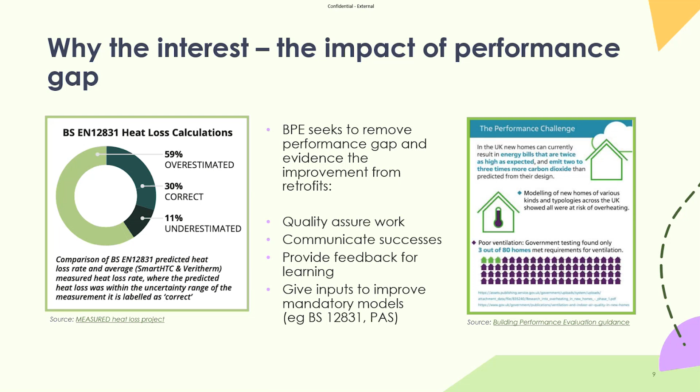So it's all about assessing quality, but how do we actually do it? What are the techniques that get used? Well, there's a range of options, most of which will provide part, if not all, of the picture. So it's often a case of selecting from the menu what suits your project best.

The most basic thing to do is what pretty much everybody already does when considering retrofit. It's a construction review, collating what you already have on record regarding the construction and energy performance of your home. You can get this from EPC, from asset records, from other data in your organization. And it's very scalable and affordable, but it's often quite low quality. And in most cases during retrofit projects, and particularly funded retrofits, you're likely to find that you need to augment it with additional on-site surveys.

Alongside that, you've got options to collect occupant feedback. That's a really underappreciated but powerful approach. It's very valuable in highlighting specific pain points, although it is obviously subjective.

For gold standard and high confidence that you get the results you want from retrofit, more technical methods generate solid quantitative data on the performance of the building fabric. These complement occupant feedback with tests that measure the performance of the fabric alone. And that allows comparison of benchmarks before and after you've made the investment in the fabric of the building. So examples of these would be air pressure testing, thermography. Both of these are quite widely understood.

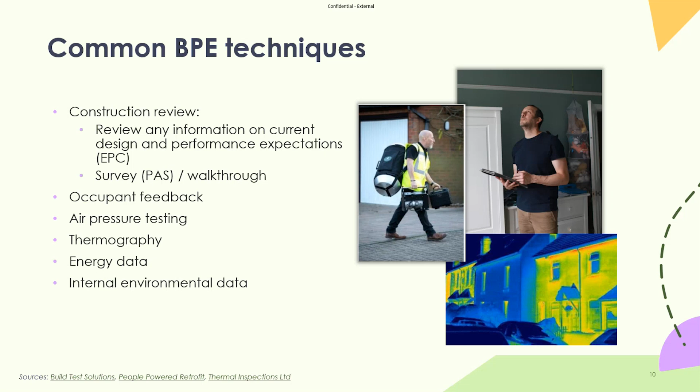So this next bit is in rather more depth and detail than the Building Performance Evaluation guidance, but it's kind of important because we've got this new abundance of data, and that needs quite careful handling to make sure you get solid and accurate information. The first thing I would say is there is a difference between monitoring and measurement, and it's important to sort of get our heads around this.

Monitoring will report conditions in homes day by day, month by month. It will allow you to spot homes that are deviating from what's normal. Measurement is taking the same data that monitoring delivers, but it's applying it into a consistent process, a test in essence, that allows you to compare performance between homes.

And what that means is that not all monitoring data is suitable for particular tests and measurement. A very simple example, if you want to run a test or measure condensation risk in a bathroom, you're really going to struggle to do that with data from a thermostat in a hall. And so there are now, as I say, a lot of options for collecting environmental data in homes: smart thermostats, connected smoke alarms, data from heat pumps or TRVs.

But it's really worth taking a step back and thinking about what tests or measurements you actually want before you assume that the data from those is going to be suitable. Obviously, there's also an increasing number of smart meters out there in the world. I would say they're very, very powerful and useful, but retrieving the data from them can be more effort than expected. So I've seen a lot of retrofit projects that are now budgeting for and planning for monitoring post-works.

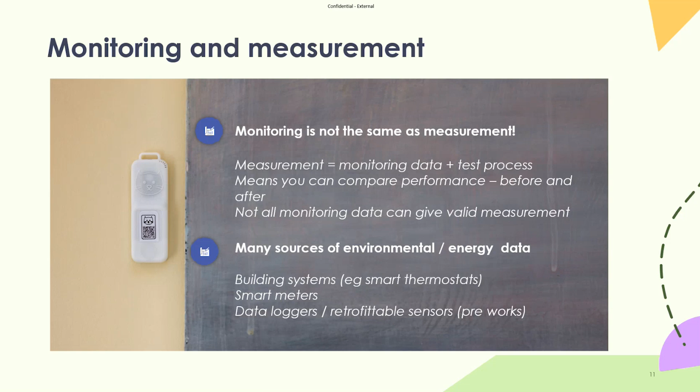I think fewer have found a way to cover the testing pre-works, and I'd really advocate for trying to find ways to do that, because it's a much more meaningful set of measurements if you're able to actually understand what your baseline is, where you're starting from.

Okay, so all of this data, you often find you've got an enormous amount of data coming out of every house, and so the key thing when you're trying to work through hundreds of homes in a retrofit is to turn that as quickly as you possibly can into a few key figures, a few benchmarks from each home that will actually move the needle and matter. So what do we think is a helpful benchmark? How can we compare the performance of a top floor one bed flat with a four bed semi-detached?

Well, there are a number of things that I look for in a good benchmark. You want the measurements that reflect the performance of the fabric of the home as much as possible without too much influence from the residents. Another way of thinking about this, if you change the tenants tomorrow, how much might that number move? So you want also measurements that can be validated or tested for accuracy, that bear a proven relationship to what's going on in the real world. And of course, you need measurements that you can make in an affordable way. We'll get onto that in a bit.

We also want benchmarks that are meaningful for the people that are using them. We can, with a kit that we use, provide really technical benchmarks like heat transfer coefficient, scientific tests, physics-based numbers. And those are very useful for designers who need accuracy in the measurement and are familiar with building physics. But if you use that to talk to tenants, actually, that's not what they care about.

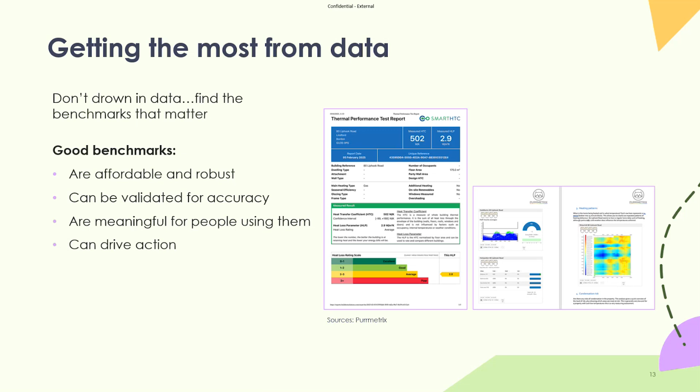Finally, of course, you want the measurements, the benchmarks that drive action, whether it's deciding which homes need to be prioritized, which homes might need some more assessment to understand whether there's a particular problem and what the root of that might be. So here's a quick example of a test process in action, and then we'll get into a little bit about what this delivers. This is really a standardized assessment for retrofit benchmarking. It's delivering information on heat loss, condensation mold risk, air changes or ventilation in the home, and comfort.

We're using here data collection equipment where we know the performance of the sensors, we understand how to deal with data gaps. We know that we will be collecting data for 3 to 4 weeks. We have standardized locations for multiple sensors within the house. So, we know which rooms we want them in and we know where we want them in the rooms. And we have a process for how and when we collect energy data.

In this setup, we're reading temperature, humidity, CO2 data in a home for 3 to 4 weeks, and we're reading the meters at the beginning and at the end of the test process. This is a process that's used before and after retrofit, and it's important that we use the same process each time.

That said, it's really important to balance this accuracy of the test process against how easy it is to use and how acceptable it is to the residents. You need something that isn't going to require any change in behavior for the residents. You need to just have it sitting in the background quietly collecting data. So that's an example of a fairly straightforward test process.

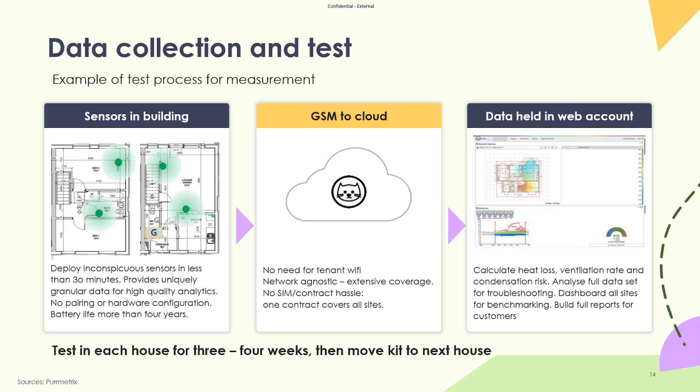Perhaps we can have a look at some of the results. One set of results that I think people are very interested in at the moment is heat loss testing, which provides a clear measurement of a home's insulation, designed to identify stock that would really benefit from fabric investment and also help size heating systems. This is a test that is generally done in the heating season, because we need heating energy in order to do it.

It'll provide you with three main outcomes. One is the overall heat loss from the whole envelope of the home, which is the heat transfer coefficient. Unhelpfully, that number gets larger the larger the envelope. So in order to allow us to compare our one-bed flat with our four-bed semi-detached, we divide that by the floor area of the home to give you the heat loss parameter. And that allows you to compare the performance of different sized buildings.

The heat loss is also a crucial input into the peak heat demand, which is essentially how much heating power you're going to need when you apply that level of heat loss on the coldest heating day of the year. So that's one example of a key measurement. This should not be changing with tenant behavior. This is an attribute of the fabric of the home.

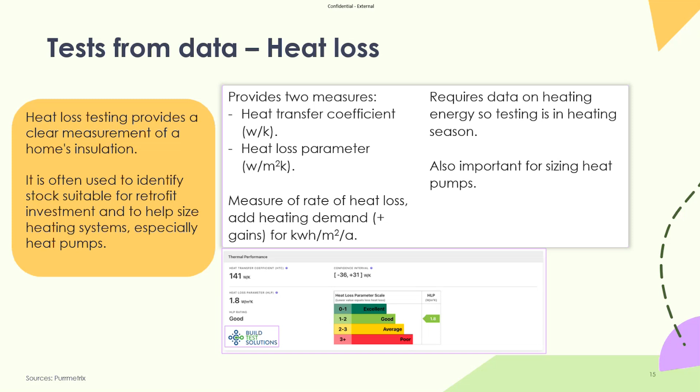Another attribute of the home that you may be testing for is condensation, damp and mold risk. This one is important to look at alongside heat loss and ventilation because all three are interrelated. There are several vendors now who provide test processes to assess condensation risk. With the process we've just been talking about, we're using humidity data to identify moisture risks inside homes from several different locations. That uses a risk model with two major factors: the average humidity for each location across the test period, and the duration and peak of the humidity events in the test period.

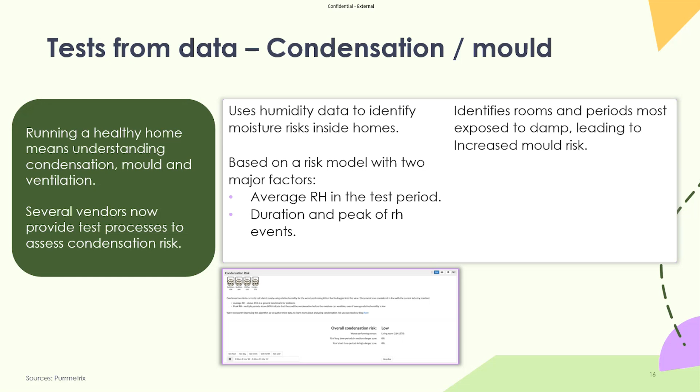And because we have data from a number of different rooms, we're able to identify rooms and periods most exposed to damp and leading to increased mold risk. Where that relates to heat loss and ventilation is that if you have a home that is already quite close to having a condensation, damp and mold risk, you may want to pay particular attention to just how much you wish to cut back on infiltration and ventilation, or at the very least make sure you have a very aggressive ventilation strategy.

So talking of ventilation, that's a tricky one to balance. It affects both heat loss and people's health within a home. Because we're measuring CO2 in this test, we can use it to understand ventilation and its relationship with heat loss and CDM. Our tests use CO2 data to measure how quickly air is replaced in the space and give you basically an air change rate. And we also look at absolute CO2 levels to see if the air quality at any point is degraded and likely to be fostering the exchange of viruses and things like that.

It's not the same as air tightness in that this is affected by a resident's behaviour. If they open a window or they're closing trickle vents, you'll see this reflected in the air change figures. But arguably, that's actually a more realistic measurement of what is actually happening in a home that you're improving.

Finally, because we have data on temperature, we're also, on the right-hand side here, using that to look at how many hours of warmth the home is providing. Generally, we think of that as how many hours of warmth between 18 and 22 degrees or 21 degrees the home is providing over the test period.

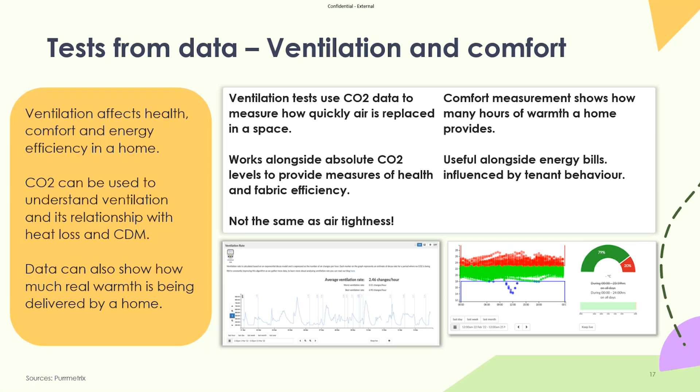And that's a really helpful thing to discuss with residents alongside energy bills because it gives them both how much it's cost and how much they're getting for their heating energy consumed. Okay, so that's the sort of benchmarks that we find useful in evaluation.

So in retrofit, it's important to understand that we've all got barriers of time, cost, resident acceptance on this sort of thing. So we've got to design a process that balances the benefits of getting good measurements of performance against the overall costs of this, the time needed to actually make it happen in a busy project plan, and residents' reluctance to have you poking around in their homes.

And specifically for retrofit, I think we're seeing an emerging sort of workflow that uses the lower cost methods initially, with more detailed investigations following on where they are needed. Now, for most publicly funded retrofit, you are likely to be needing additional surveys for compliance anyway, a PAS 2035 assessment, for example. And then you have a tentpole activity that can be expanded to include other forms of BPE.

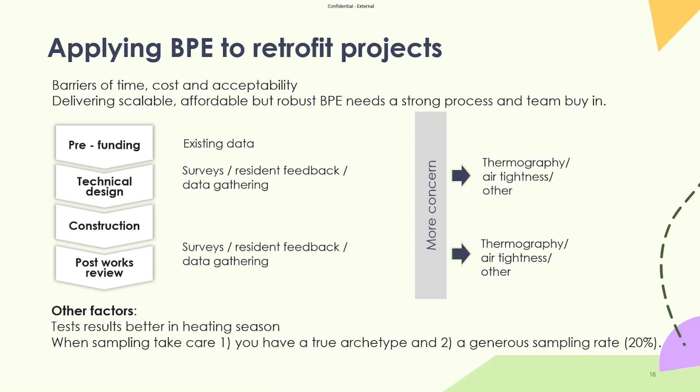Great, Sophia. Okay, so once you've put work into delivering all of these benchmarks and results from your measurements, you've got these valuable assets that you can and should really be sharing with quite a few different stakeholders who are going to be interested in the outputs of the project. Of course, the results don't just have to stay in the software platform. They can be integrated into asset management systems, get turned into technical reports, into case studies, occupier feedback reports that you can give to a tenant liaison officer.

And this is a table that just gives a few ideas on how that information can be shared, and you can really squeeze as much value out of it as possible. Residents in particular, we're finding quite a lot of use of this for resident feedback to provide reassurance on the impact on their comfort, their mold risk, their bills. Sometimes it's about suggesting ways in which residents might change their habits to engage more productively with the new environment.

For asset managers, this is data that is really helpful on highlighting risks and managing risks around compliance and energy efficiency or CDM. A lot of the good contractors now are very interested in using data to demonstrate the impact of the work they do, and also to do tests that quickly highlight where there's any defects or things that they need to intervene on.

And for sustainability managers, of course, this stuff is the bedrock for demonstrating your return on investment as far as retrofit is concerned, and making the case for the next round of investment.

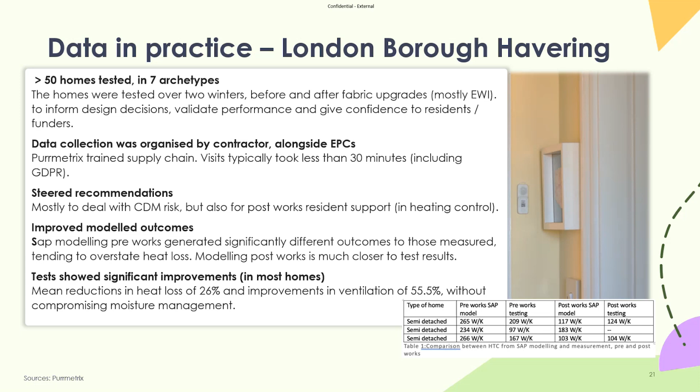Across the board, overall, we had 26% reduction in heat loss and a reduction in ventilation, or an improvement in ventilation, of 55%. No trace of there being a CDM or a moisture risk. So just to get into the data in a bit more detail, this is perhaps the sort of summary you might find if you integrate this stuff into an asset register.

All of these homes now are EPC C in theory, but note they still show quite a range of HLP, heat loss parameter figures, from 1.4 all the way up to 2.3. And we've got two archetypes in this table. So there's a distinct difference in performance between these two archetypes.

B has an average reduction in heat loss of 24%, and doesn't seem to respond as well to EWI as archetype D, which is getting to nearly 30% heat loss reduction. It's also worth noting that the heat loss for archetype B does vary a lot more across that archetype. So it is a sort of set of homes where there's more challenges, I think, around delivering EWI that works really efficiently for residents.

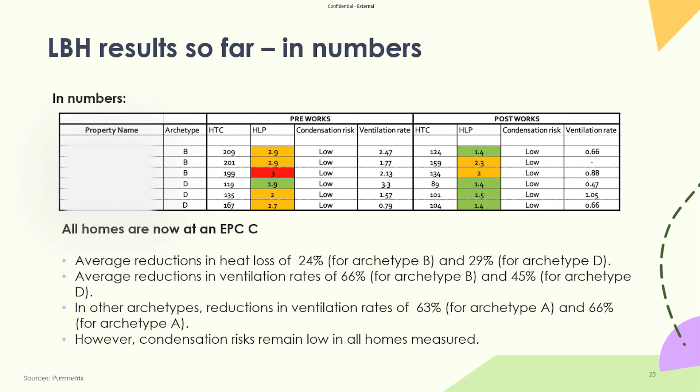All the homes now have low condensation risks, even though the background ventilation rates are now reduced. So we'll be confident going forward that in these homes, the fabric is well designed to deal with damp and moisture management. Behind all of these averages, there are individual homes with individual stories, and these are the stories that are really relevant to residents and help understand actually how retrofit is received, I guess. So I've got a couple of homes here that tell quite contrasting stories.

In both cases, what we've got are the results from the comfort tests done a year apart, before and after improvement. So in House A, what we're seeing is a house that, on the face of things, doesn't seem to be showing an enormous amount of improvement. These graphics are basically representing how many hours of warmth is being delivered during the test process. Warmth is between 18 and 21 degrees.

And you can see that in January 2023, there's a slight reduction in overheat. But broadly, this is a home that's always been kept at fairly high and consistent temperatures. However, if you look at the data on energy consumption and the external temperature, you do see where the improvements come in. Gas consumption has fallen significantly from 7 meters cubed in February 22 to just over 4 meters in January 23. And this is despite the fact that the average external temperature is a lot colder in 23, at just under 6 degrees compared to 9.5 degrees in the earlier year.

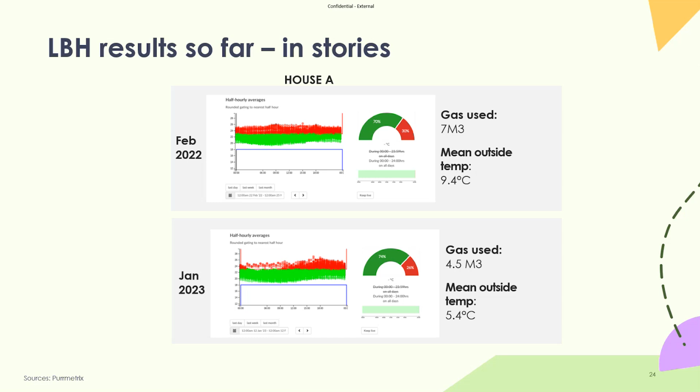So that's two very different stories that could be discussed both with these residents and also with future residents, some of whom will relate more to the story of House B than to the story of House A. And it's really most powerful when you put it alongside other BPE techniques like occupant feedback to help you understand the impact of your retrofit.

So with that example, I'll finish the main part of this right here. I hope I've given you some practical insights into how building performance evaluation might work within your project. If anyone is now inspired to revisit your retrofit project plans to incorporate more evaluation, I'd be very happy to take questions on how it all fits in, or questions on anything else related to BPE.